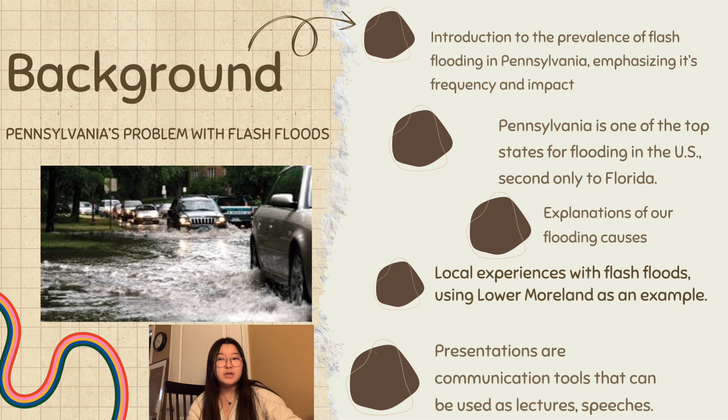The reason we get so much flooding is because of our intense precipitation levels, and even when rainstorms are short-lived, the sheer amount of rainwater, combined with the imperviousness of our roads and the overflowing of storm drains, can commonly become a recipe for flash floods. Our county of Lower Moreland has experienced this many times, and despite its often short-term effects, flooding still makes roads dangerous for driving. Rapid urbanization has led to numerous challenges, including increased water pollution and a resulting higher risk of flash flooding due to impervious surfaces.

Traditional stormwater management systems often fall short in addressing both environmental and infrastructure concerns. Our project responds to this by proposing a novel water filtration system that not only prevents pollution from seeping into the ground, but also enhances the ground's ability to absorb water, mitigating the impact of flash floods. The innovative design draws inspiration from the layered structures beneath permeable surfaces commonly used in urban infrastructure.

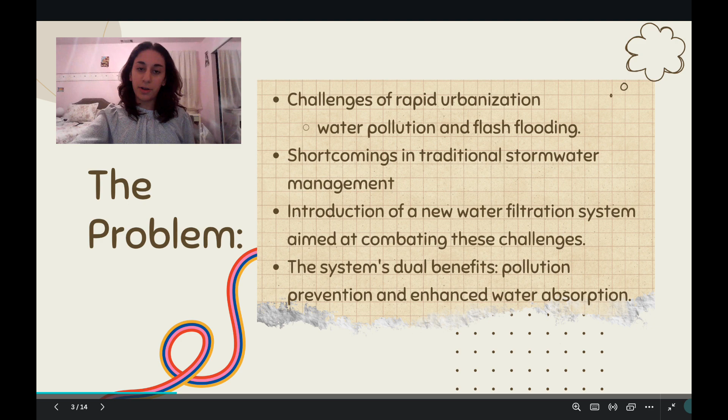To learn more about how we could address this issue, we reached out to Kevin Conahan, a senior traffic project manager at AECOM, who has worked with PennDOT on roadway design and maintenance, including projects that involve stormwater drainage systems. In our discussions, Mr. Conahan brought up some very important points, such as that one of the main reasons that roads are not able to absorb water is that the pavement and clay soil, which is often buried underneath it, does not absorb water particularly well compared to materials like sand or gravel.

Another thing Mr. Conahan informed us about is that PennDOT does not widely use porous asphalt or other permeable materials designed to address pollution on the roads. However, he was able to offer advice in constructing roads to mimic the design of materials laid underneath roadways. He described how when laying down layers of sediments before depositing pavement, larger aggregates are often poured underneath finer materials like sand in order to provide support and level out the roadway.

He also told us that when layering these aggregates, often synthetic net-like fabrics are wrapped around each individual layer to keep them in place. This is important because, as we soon discovered, when smaller materials intermingle with larger materials, it creates ruts and holes in the top of the road and loses structural integrity.

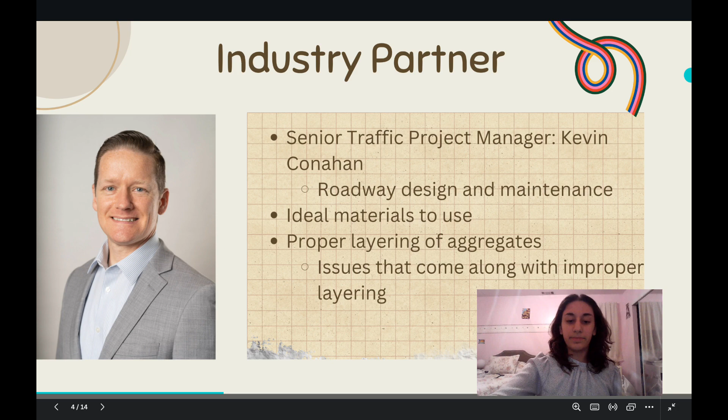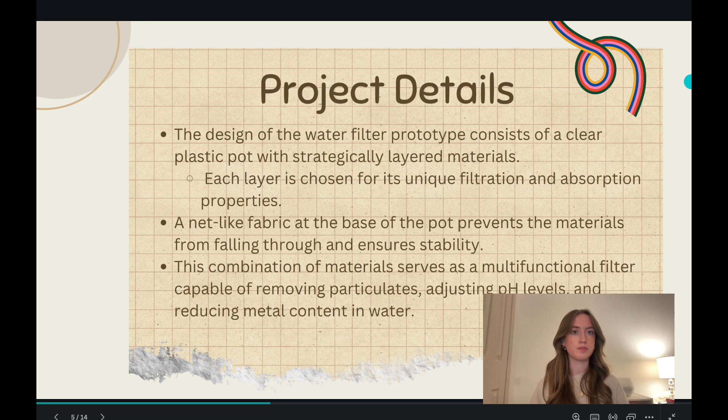So the design of our water filter prototype consists of a clear plastic pot with strategically layered materials, each chosen for its unique filtration and absorption properties. A net-like fabric at the base of the pot prevents the materials from falling through, which ensures stability and prevention of the filter materials escaping. The layering sequence includes marble chips, pebbles, mini marble chips, limestone pellets, leveling sand, regular sand, and activated carbon. This combination of materials serves as a multifunctional filter capable of removing particulates, adjusting pH levels, and reducing metal content in the water that's filtered through.

These selected materials in our water filtration system contribute to filtering water by taking advantage of their unique properties. The marble chips, for example, play a crucial role in adjusting the pH of the water, which helps to neutralize acidity and create a more balanced environment. Pebbles and mini marble chips primarily aid in the mechanical filtration process, acting as barriers to larger particles and sediments. Limestone pellets contribute to ion exchange by reducing the concentration of metal ions in the water through absorption.

Meanwhile, the leveling sand and regular sand layers further clean the water by trapping smaller particles and impurities, providing both mechanical and chemical filtration, while activated carbon and charcoal use adsorption, removing organic contaminants, odors, and residual chlorine from the water, in addition to being a disinfectant. The cumulative effect of these materials provides a comprehensive water treatment process that alters the pH levels, metal content, and particulate concentration, along with microbial contaminants, resulting in improved water quality that can be used for various applications.

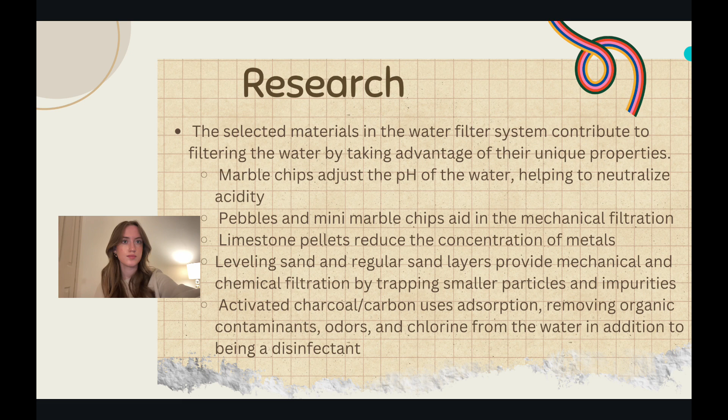Our design process involved first gaining a comprehensive understanding of the properties of each material and their interactions when it came to filtering. After selecting our materials based on these properties, we then attempted to optimize the arrangement, considering factors such as particle size, porosity, and chemical reactivity to design our first prototype. Testing was conducted with various water samples, measuring the pH, metal content, and particulate concentration before and after filtration. Iterative improvements were made based on these results, leading to an optimized design that provided the best possible filtration.

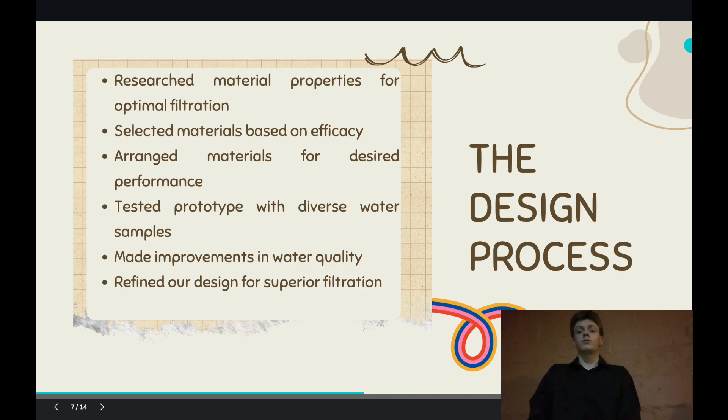One problem that we shortly ran into was the infiltration rate of the water. Since one of our goals was to increase the groundwater absorbance in certain areas by replacing impervious materials with our porous layers, we also had to prioritize the speed at which the water was able to pass through the filter layers. This conflicted with our goal of filtering water because the filtration ended up being most effective when layers were ordered from top to bottom in increasing particle size. But the water was absorbed by the material nearly twice as fast when the larger materials were on top, since the larger gaps allowed more water through than the smaller gaps.